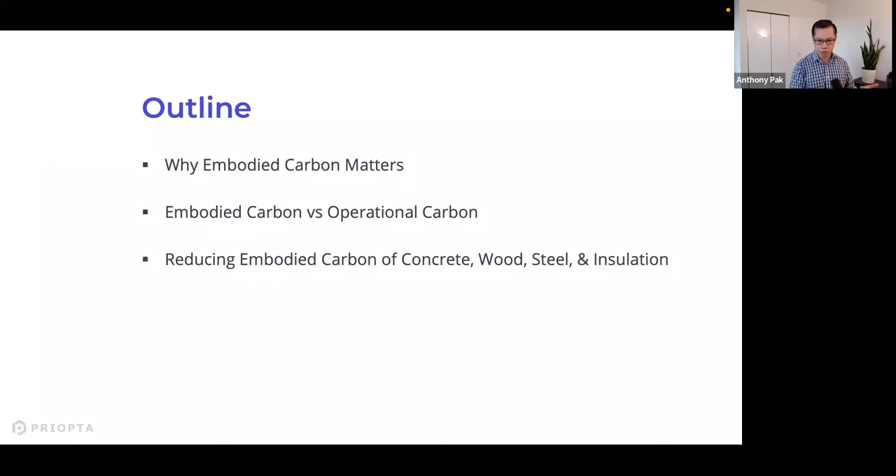Today I'm going to be talking about why embodied carbon matters, how embodied carbon compares to operational carbon, which is a topic many of you are probably very familiar with. Then I'm going to go into some specific strategies for how we can reduce embodied carbon from key materials like concrete, wood, steel, and insulation.

So first off, why does it matter? When we're talking about embodied carbon, we're referring to the emissions associated with construction materials. Think of all the materials that go into a building: concrete, steel, glass, wood, insulation, etc. All of those materials have emissions associated with them.

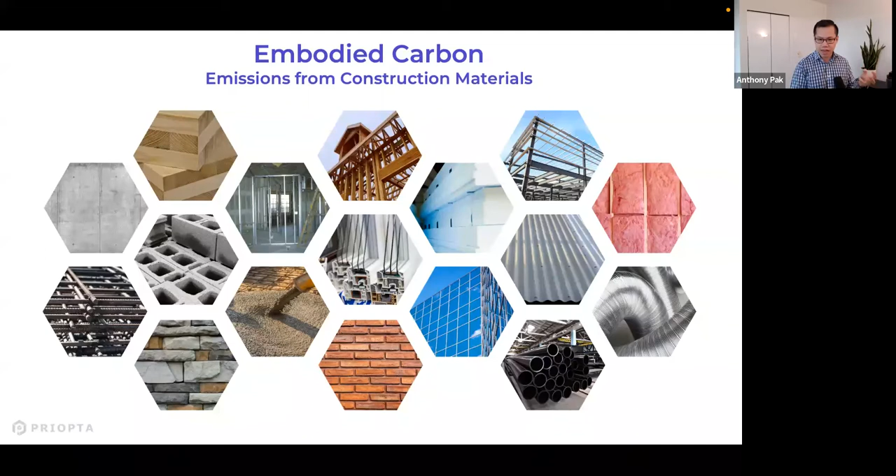And we're looking at emissions across the life cycle, everything from resource extraction, manufacturing, processing, transportation, all the way to end of life: deconstruction, demolition, landfilling, incineration, recycling, etc. So we're looking at all those steps throughout the life cycle of all the materials inside a building, and we quantify all of the emissions associated with that.

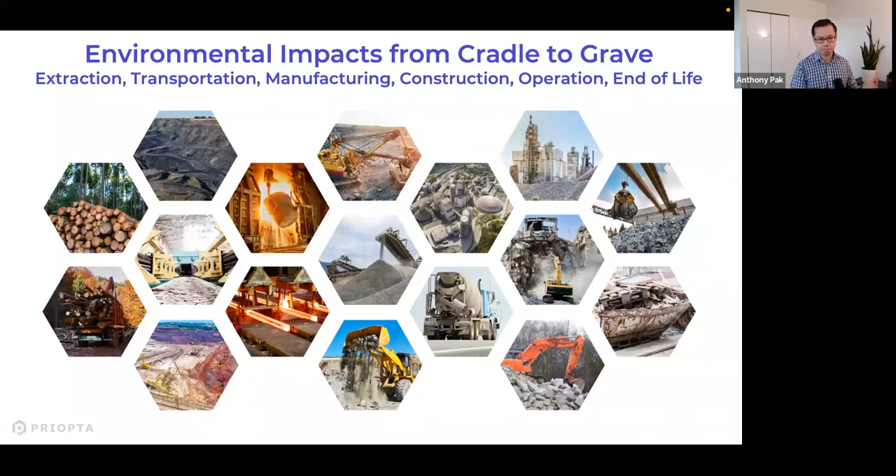Now, how significant are these emissions? If you look at the global annual CO2 emissions, about 28% is associated with operational carbon emissions - that's all the emissions from heating, cooling, and operating all buildings on the planet. A further 11% is associated with embodied carbon - that's all the new construction and major renovation that takes place each year, all the materials that go into that.

What's interesting is if you divide up the pie in different ways - if you just look at even three of the key materials, concrete, steel, and aluminum, together they make up about 22.7, almost 23%, of global CO2 emissions.

The reason why this is much bigger is obviously these materials get used not only for buildings, but also for infrastructure, and in the case of steel and aluminum, things like cars and other products. So if we can influence the embodied carbon of these supply chains of some of these key construction materials, it'll have an impact not only in the construction sector, but more broadly across other end uses.

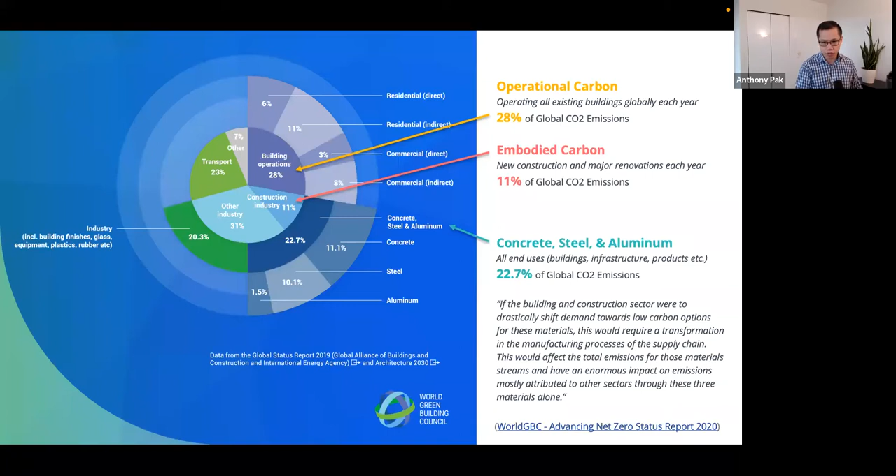Now, I know this graph is probably a bit hard to see, so I'm just going to zoom into some of the key areas.

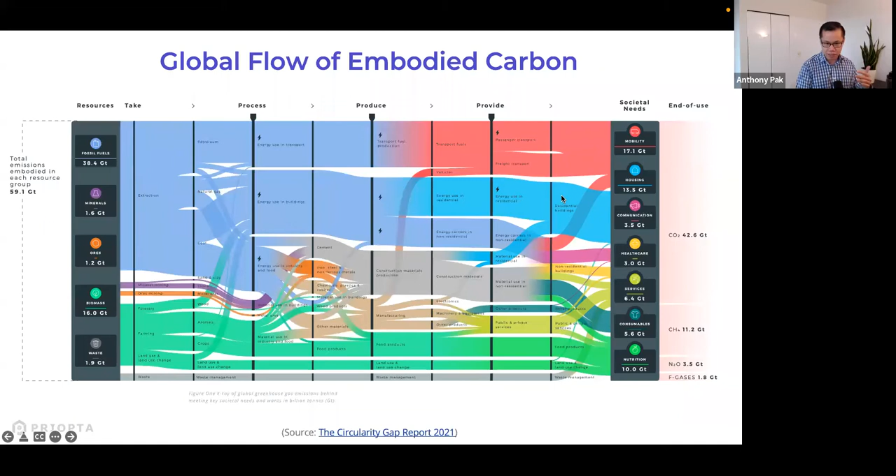If you zoom into just this certain section of the diagram right here, you see some materials here: sand, clay, stone, metal ores, wood, etc. And those emissions seem kind of small.

But then as you move towards this section where you see cement, iron, chemicals, plastics, rubbers, wood products, other materials, you see it actually grows quite a bit, because there's emissions not only from the extraction of these materials, but also a lot of energy that goes into them. One of the cool things about this diagram is you can actually see the flow of energy into these products, and so this makes up a significant slice of emissions here.

Then you can see how much of that makes its way into construction materials and manufacturing. With manufacturing, some of those go into vehicles, electronics, machinery, and whatnot. But for what we're looking at today, it's mainly the construction materials.

So these construction materials, how does that make its way into our buildings? If you look on the right side, this is residential buildings, and this is non-residential buildings. So these are all the buildings altogether.

Now, a lot of the emissions come from the energy use, so that's this slice—this is the energy use, the operational carbon emissions. Same thing on the non-residential buildings, you see this flow right here. But then you can see where the embodied carbon, the materials, come into play—how much of that makes its way to residential buildings and non-residential buildings. So a very significant slice of the emissions.

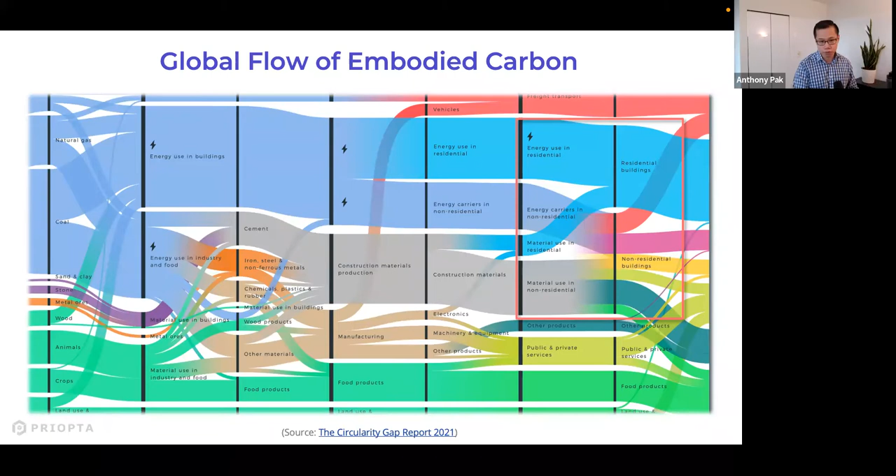And this has been a blind spot because we have not been quantifying these emissions for most of our new construction projects. So let's get down to the building scale.

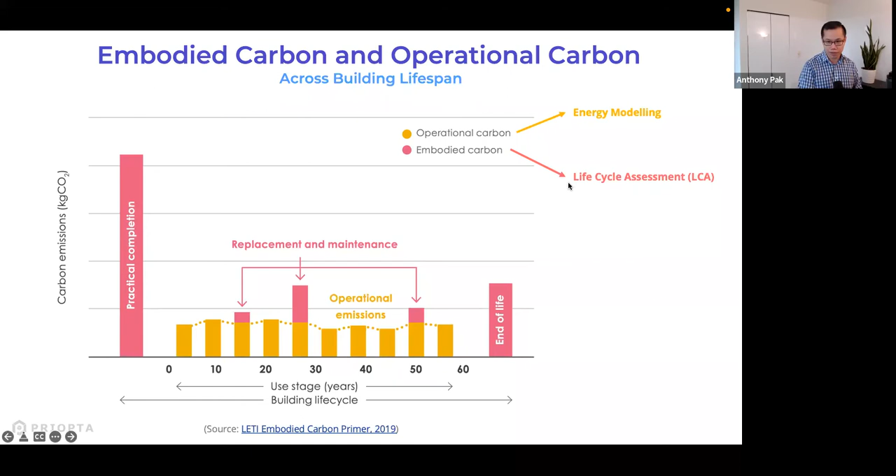So that's during the design phase, we quantify that through life cycle assessment. And when we do a life cycle assessment, we actually look at multiple environmental impact categories.

The one that most people are concerned about is global warming potential, which we refer to as embodied carbon. But there are also other impact categories we're looking at, like acidification potential, eutrophication, smog formation, depletion of non-renewable energy, and ozone depletion.

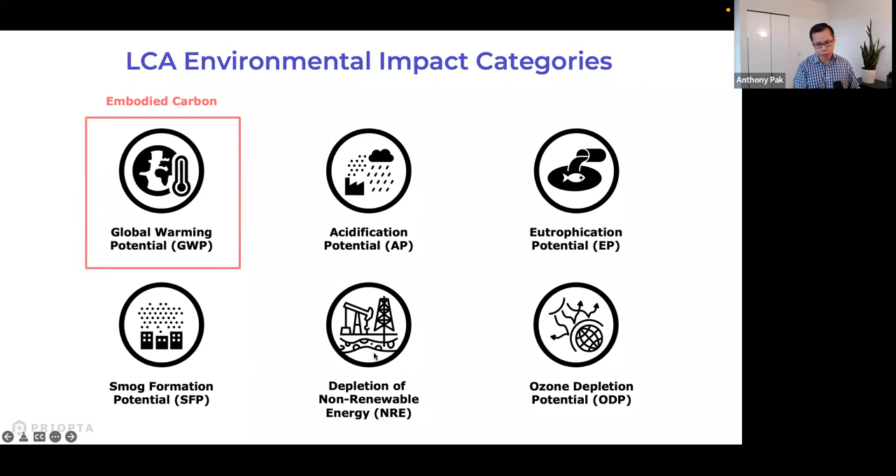So I mentioned we quantify this using life cycle assessment. What do we mean by life cycle? There's actually formal definitions for each of these life cycle stages. For example, we have what we call module A, B, C, and sometimes we report D. A to C is kind of the cradle to grave, so to speak.

Module A is the upfront carbon. That's everything including raw material supply, so extraction, transportation, and manufacturing. The emissions that, sometimes you may see environmental product declarations from manufacturers, they're mostly reporting the emissions at these stages - basically everything up until it leaves the manufacturing facility.

Then we get to A4, which is transportation to the construction site, and then A5, which is construction installation. So all the A stages combined - this is basically before the building is occupied, all the emissions up until that point. Then module B is the use phase.

So the biggest portion is probably the replacements. When we have replacements, we'll account for that, but we also include things like maintenance, repair, refurbishment. And then module C is the end of life emissions.

So typically you see LCA studies reporting A to C. Sometimes they may report module D - things like reuse, recovery, recycling. This is benefits and loads beyond the building life cycle. So basically, if you recycle materials, for example, that's going to impact the next product's lifespan or whatever that recycled material goes into. And in a way, you're trying to quantify those benefits, but it's a little bit out of your system boundary.

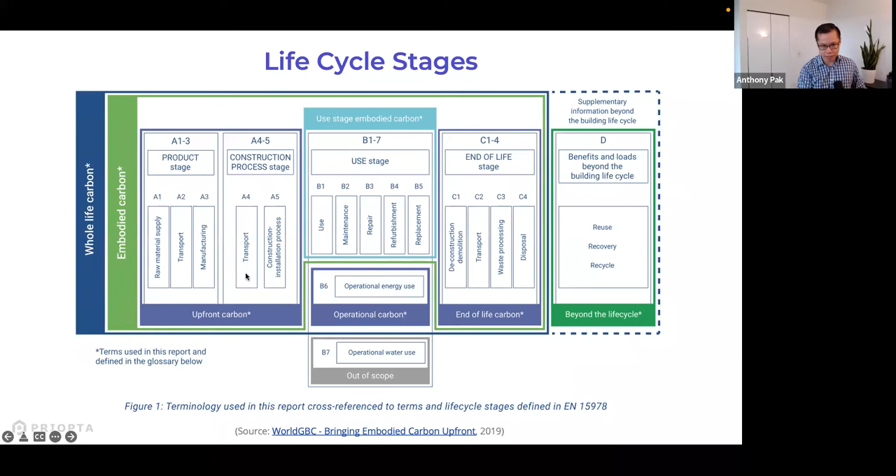Now this A to C, this is the embodied carbon. But if you factor in operational energy use - that's like operating the building, the energy modeling results, or your utility bills once you actually are in operation - you add those two together, that's how you get the whole life carbon, the holistic picture of the carbon emissions of your project.

Now historically, the thinking has been that operational carbon emissions are far more significant than embodied carbon. So we don't even need to look at embodied carbon because operational carbon emissions is where most of it's at. Now I don't want to paint this as pitting one versus the other - we need to address both.

But in certain regions and over time, certain places, as we decarbonized our buildings and started to get cleaner electricity grids, have more renewables in there, and design more energy efficient buildings, this operational carbon is decreasing. And so embodied carbon becomes a bigger slice of a smaller pie, so to speak.

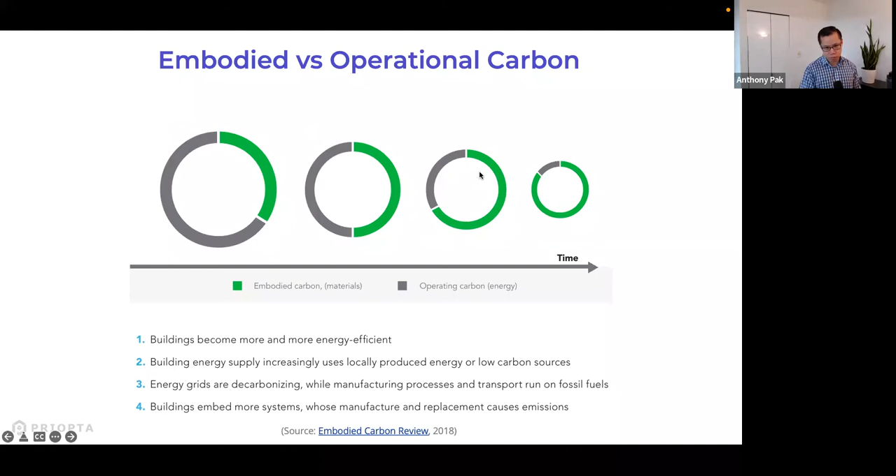So let's start off with operational carbon emissions. These are numbers that maybe you're more familiar with, but let's say a baseline building in Vancouver, maybe that's around 20 kilograms of CO2 equivalent per meter squared per year. Whereas a place like Calgary with a lot more fossil fuels, a lot of natural gas heating, colder climate, and also higher carbon intensity in their electricity grid, it can be as high as 71. So it can kind of vary a lot.

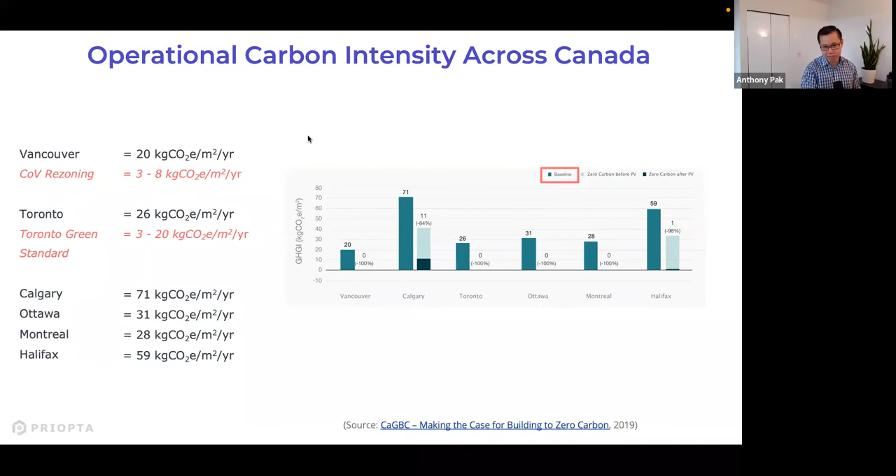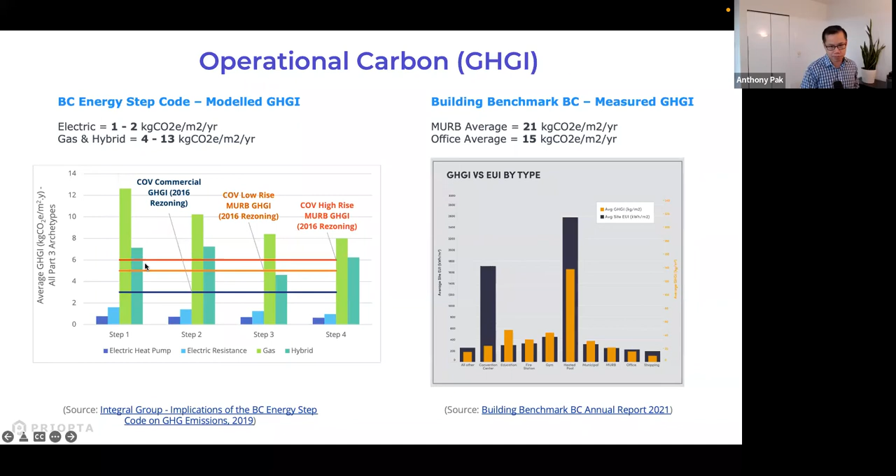This is kind of a baseline building. Now in BC, we have the BC Energy Step Code. This was a study done by Integral where they looked at across the different steps. As you get higher in the steps, you get more energy efficient. But there's also variations between mechanical systems. So if you have electric driven systems like heat pumps and baseboards, you can actually get the emissions very low in BC because we have a lot of hydroelectricity and the electricity grid is relatively low carbon. And as we drive the operational carbon numbers down quite a bit, embodied carbon becomes a bigger slice of that. So that's the operational piece.

What about embodied? These are two different sets of benchmarks that look at roughly over 1,000 buildings. In the Carbon Leadership Forum back in 2017, they created this study where they looked at the range, and you can see generally the results are, let's say, between 100 or below 100 to a little, sometimes over 1,000 kilograms of CO2 per meter squared, with many of them in the 200 to 600 range.

Similarly, in One Click LCA, which is one of the software tools, they've created these benchmarks. They show you what's the median or the D level, and then what's considered good, what's considered high emitting, with ranges across all of these. These are just examples of the rough order of magnitude you can expect for some of these projects.

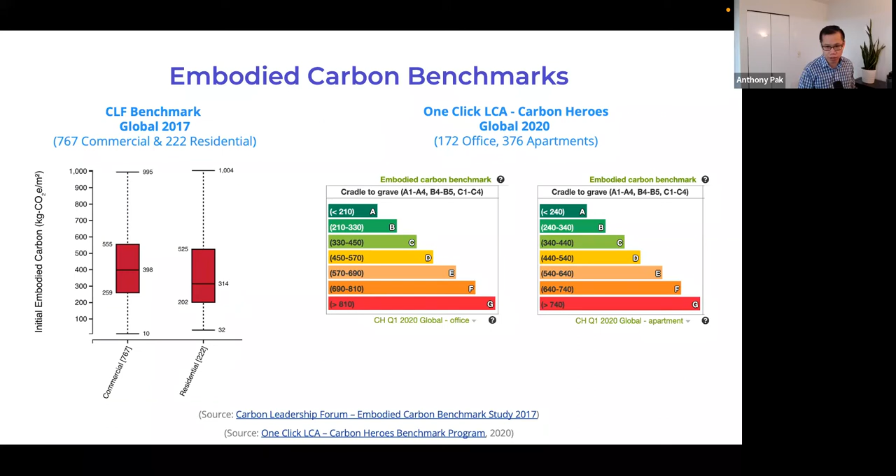So when you piece those two together, as I mentioned with the BC example, this is actually one of our current projects. You can see the embodied carbon is about 558 kilograms of CO2 per meter squared. But then we compare that with the operational carbon emissions over 60 years, and it depends on what you're comparing against, obviously, because we're in the design phase.

With our energy modeling results, we can see that even over 60 years, because operational carbon emissions have come down so much, it's 90% versus 10%. However, if we compare it against the typical office building, based on actual measured performance, that brings it to, even then, still about 40% after 60 years.

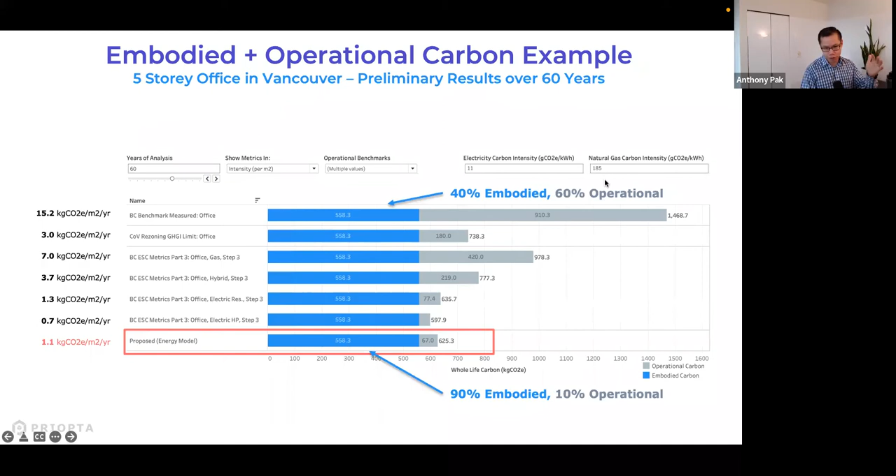It's important to note with embodied carbon, these emissions are mostly upfront, so they've already happened, whereas operational carbon emissions could potentially go down over time as we clean up our grids, for example.

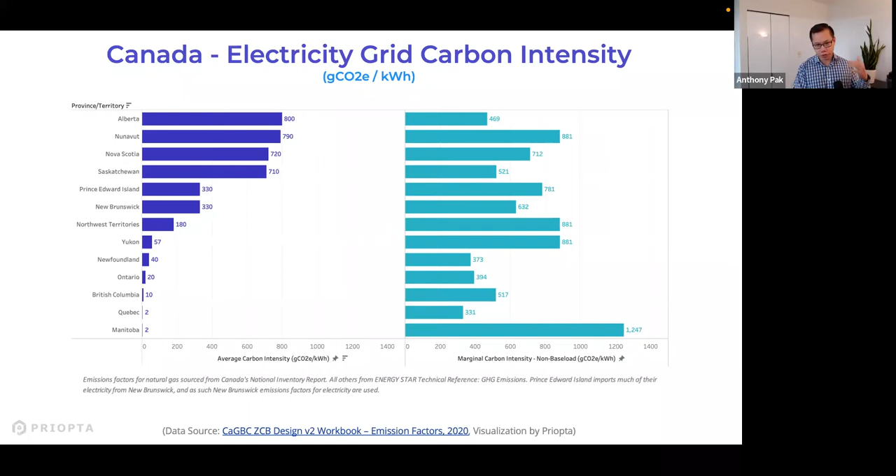There are big differences in our electricity grids. BC is very low, Ontario is very low - this is grams of CO2 equivalent per kilowatt hour. There are big differences between our grid versus grids like Alberta or Saskatchewan, which are much higher. That's going to affect your operational carbon emissions, but it also affects embodied carbon, because if your products are produced using a lot of electricity, it matters what the source of electricity generation is.

So there are many policies and certifications looking at this. I won't get too in depth, but the City of Vancouver is taking a lot of action on this. Soon we're going to be requiring reductions in embodied carbon for some of the rezoning projects.

Currently, we need to disclose and do LCAs to just disclose these results to the city, but soon we're going to move into reductions, in line with the city's climate emergency action plan, which states that by 2030, embodied carbon of new construction will be reduced by 40% relative to a 2018 baseline, applying across the board to all projects - it won't be a voluntary requirement. There's a lot of regulation coming into play, and Vancouver is definitely a leader in that sense.

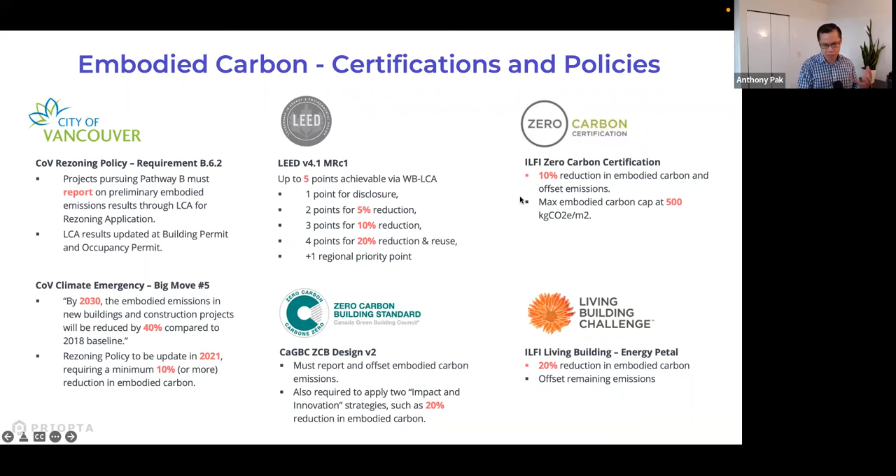There are also some other certifications, voluntary standards like LEED, the Canadian CaGBC Zero Carbon Building Standard, and ILFI's standards. They all address embodied carbon in certain ways and reward reductions.

Okay, now I'm going to get into some strategies for reducing embodied carbon. With concrete, for example, this is often one of the most significant materials from an embodied carbon perspective. So what can you do? First, the low-hanging fruit is to push for using Portland limestone cement instead of regular Portland cement, GUL versus GU. Replacing regular Portland cement with GUL, Portland limestone cement, roughly leads to about a 10% reduction in global warming potential per meter cubed of concrete, and generally there's not too much of a performance hit or cost premium associated with this. So this is something to push for on your projects.

Next is looking at reducing the cement content. Most emissions associated with concrete come from cement, so if you can reduce the amount of cement used and replace it with supplementary cementitious materials - things like fly ash or slag - that can reduce the cement content and the emissions overall. Some design parameters you could use: you want to optimize the concrete mixes across each building element. For your foundation, you might have higher SCM content, whereas for suspended slabs, you can't go as high based on curing times and the construction schedule, because this can affect the construction schedule as well.

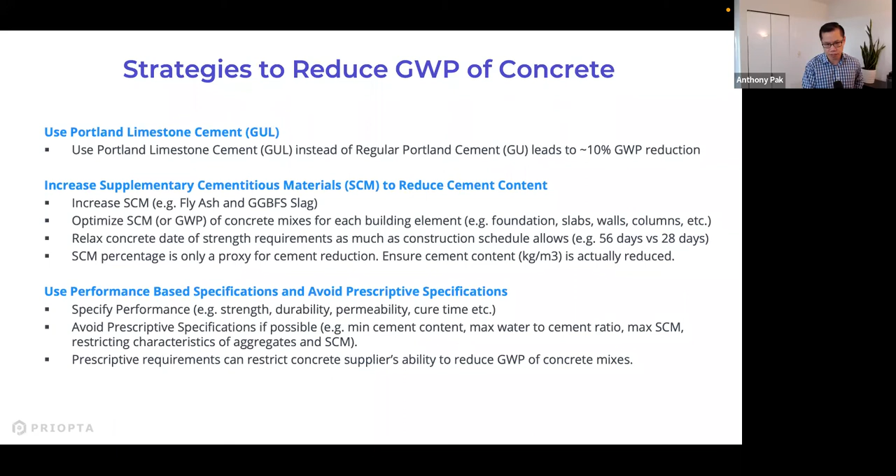But if you instead move towards performance-based specifications, that gives them more room to lower the carbon intensity of their mixes. For example, this is industry average data from the Canadian Ready Mix Concrete Association. Compared against the benchmark, per cubic meter of concrete, if you use GUL, the Portland limestone cement, and increase the SCM content, you can get up to a 40% reduction. Some local ready mix producers that have started producing their own environmental product declarations are getting close to 50% or even beyond on some of these mixes.

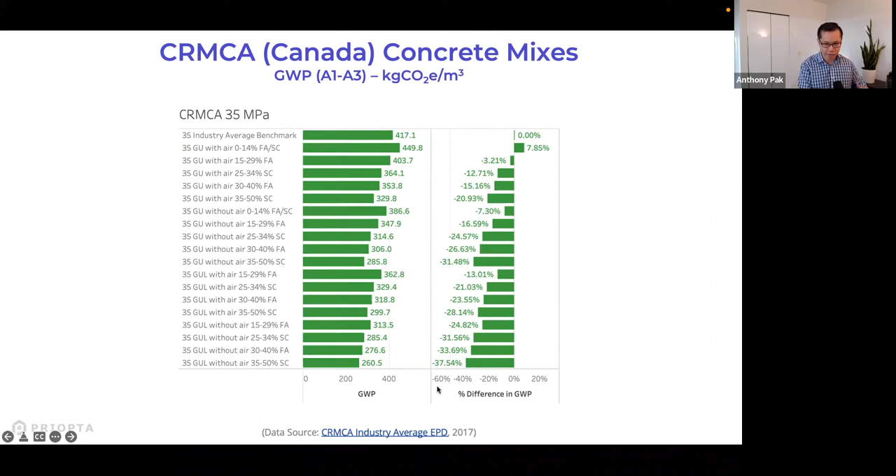So there's a lot that you can do with concrete. It's not that all concrete is bad, but there's a lot of room to improve.

Next up is wood. You've probably heard a lot of talk about mass timber. Wood-framed or mass timber buildings typically come out with lower embodied carbon compared to concrete or steel-framed buildings. However, when looking at these numbers, a key thing to understand is whether these studies include biogenic carbon accounting, and in particular, whether they factor in the carbon stored in the wood. I won't get into this topic, but it's a big point of difference sometimes.

More importantly, we need to really look at how our wood products are produced, or what's happening in the forest. How we manage the forest is a huge factor and potentially a big blind spot for us. That's where a lot of those emissions are oftentimes not factored into our LCA studies, but those factors can be far more significant. That's a whole other topic in itself, but just know that sustainably managed forestry is a big deal—we need to look into that.

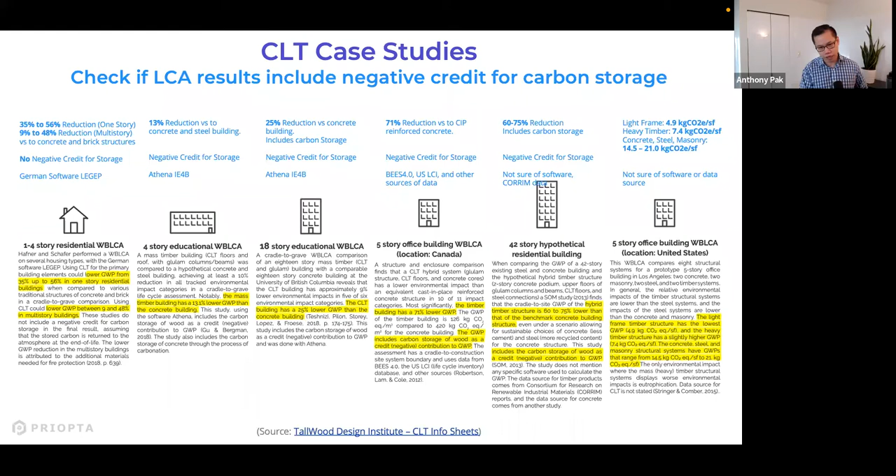Next is steel. At a high level, there are two main ways of producing steel: basic oxygen furnace and electric arc furnace. Basic oxygen furnace is how we produce most primary steel, accounting for about 71% of global steel production. It has much less recycled steel content. This is how we produce primary steel, and it's much more emission intensive—sometimes 2 or 3 times higher emission intensity than electric arc furnace.

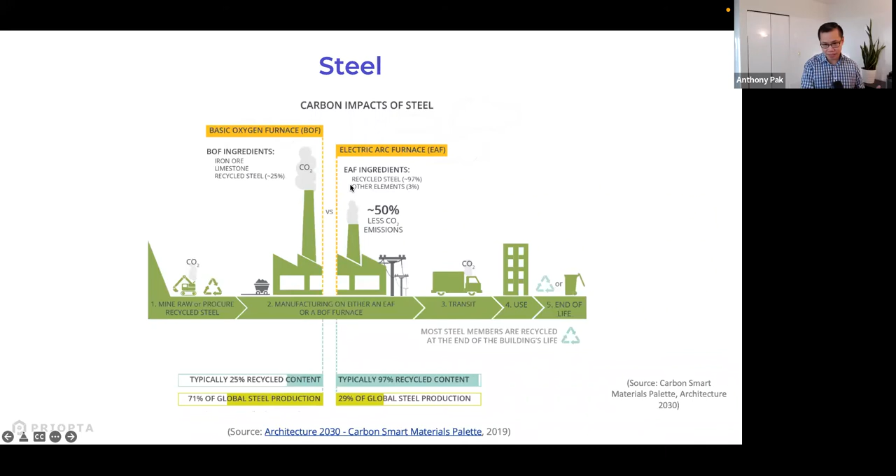With electric arc furnace, you're using mostly recycled steel, accounting for just under 30% of global steel production, and it's much lower emission intensity. Because it's an electric-driven process, it matters what the carbon intensity of the electricity grid is where that steel is produced.

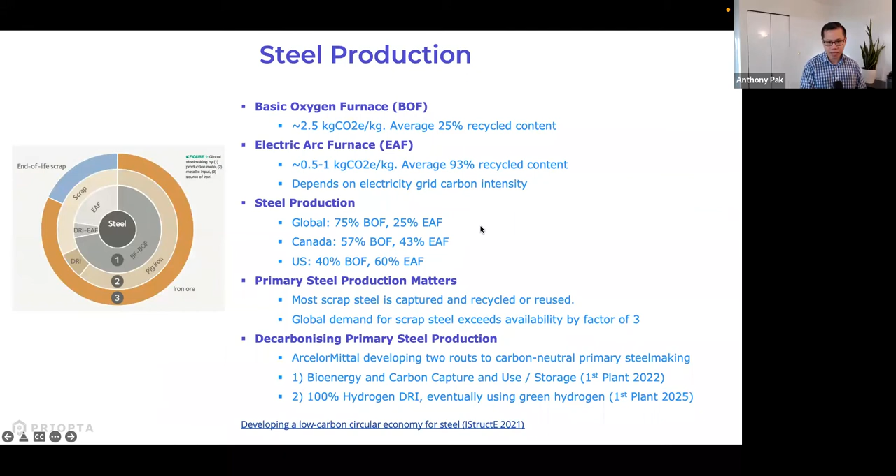Generally speaking, in Canada we're about 60% basic oxygen furnace—the higher emission variety—and about 43% electric arc furnace. So on a project level, if you can specify electric arc furnace steel from lower carbon states or provinces producing it, that can generally reduce the carbon intensity of your project.

However, from a global picture, we still need to figure out how to decarbonize primary steel production, because there isn't enough recycled steel to satisfy global steel demand. So even on a project basis, if we can reduce emissions by specifying lower carbon steel, we still need to figure out the big picture of how to decarbonize primary steel production. That's where you sometimes hear about things like using hydrogen for primary steel production—that's a really important piece.

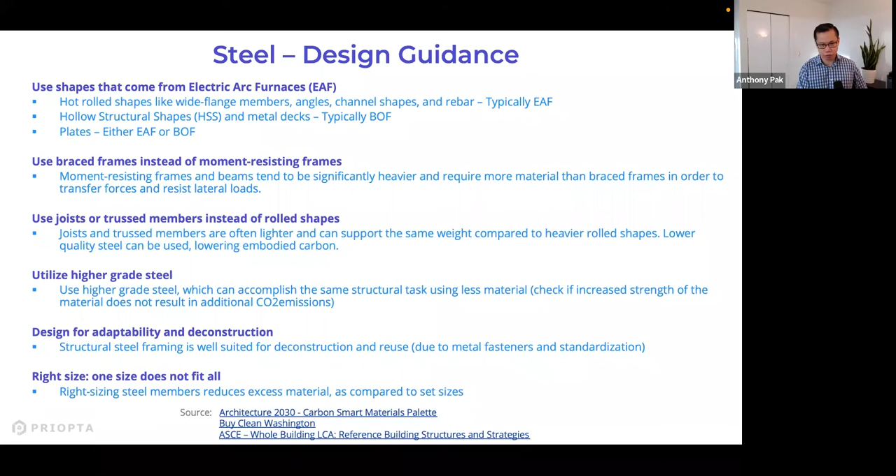Finally, insulation. The take-home message here is I want to point your attention to 2 forms of insulation in particular that are very high embodied carbon, which was a bit of a blind spot because it wasn't properly accounted for even in our LCA tools sometimes. That is XPS and spray foam.

The reason is because they use blowing agents that have very high global warming potential. These blowing agents have historically been mostly HFCs, hydrofluorocarbons, which are essentially the same as the refrigerants you use in your mechanical system. They're very high impact, and small releases of these gases are like thousands of times more impactful than CO2. Essentially, these blowing agents off-gas over time, and that leads to a lot of emissions.

But the industry is transitioning towards using HFOs, a much lower global warming potential blowing agent, which can reduce emissions quite significantly compared to the previous forms. Until about a year or 2 ago, all the XPS insulation and most of the spray foam in North America used HFC blowing agents. So for example, the typical XPS that you would just buy has a much higher impact, and this was very significant even at a building basis because it could significantly increase the emissions associated with that.

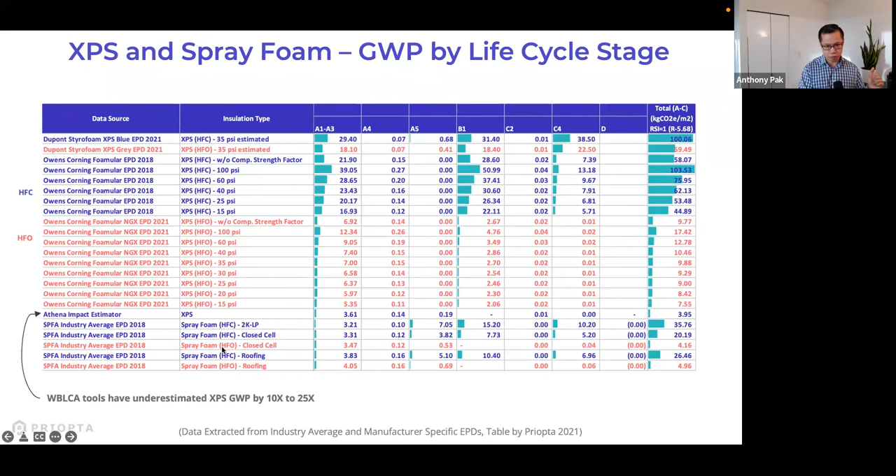Right now, as of 2021, we have new regulation in place in Canada, and manufacturers have had to come up with new products to meet that regulation. There's a bit of a temporary period where some of the old product is still available, with exemptions given to certain manufacturers. So in this interim period, this old stuff is still being sold. This is probably one of the big takeaways for your projects: look for the lower global warming potential blowing agents in your XPS products and also in your spray foam products, because they can reduce your emissions quite significantly.

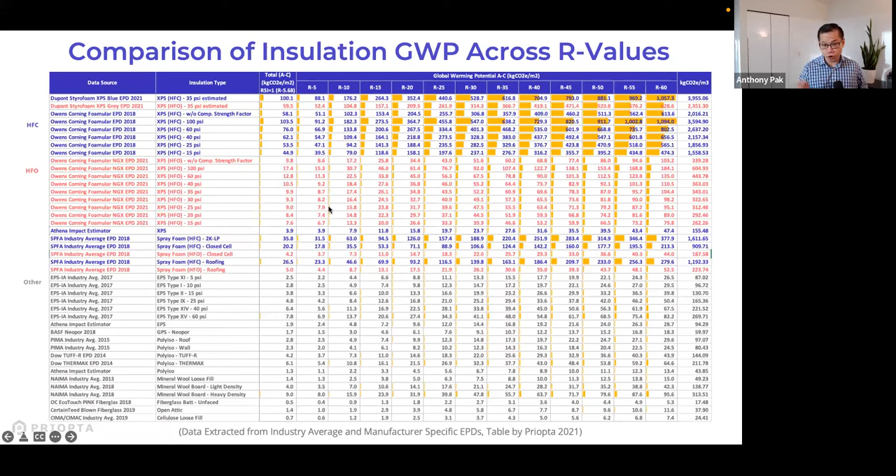The good news is there are new products coming onto the market right now. But just know that even though Canada has this new regulation as of 2021, some of the old products are still being used in this interim period. And in the US, if you're working on projects in the States, many states don't have regulation around this, so you have to actively look for this product in certain states. That's just something to keep in mind.